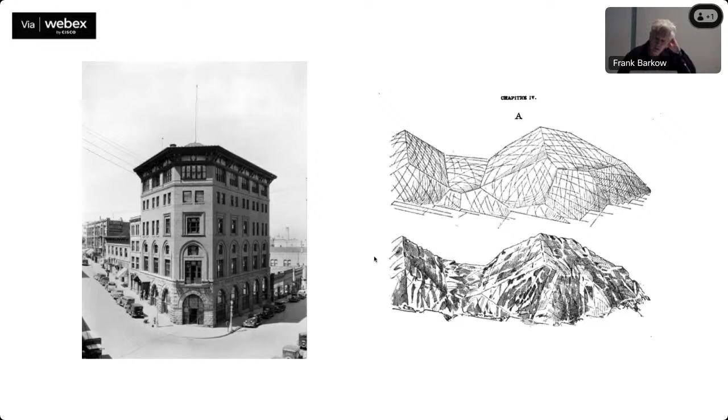In architecture there were a few historical examples like Cass Gilbert, or this amazing landscape. The drawings on the right from Viollet-le-Duc of Mont Blanc were an idea about landscape as a kind of architectural form. The first schools I went to were factories like this in Helena, Montana, the Archie Bray, which was a ceramic and brick foundry.

Some of the first teachers were people like Peter Voulkos, whose work taught at Black Mountain in ceramics, but all of a sudden started to use ceramics in a very different way than, say, a potter using ceramics, more as a kind of installation or environment. This idea of the physicality of working directly with materials was essential for us and how we work today.

I didn't begin as an architect, but as a carpenter, in Germany you say a Zimmermann, framing houses throughout the Rocky Mountains. But I began to understand the relationship between construction drawings and physically building, particularly in timber, in the Rocky Mountains.

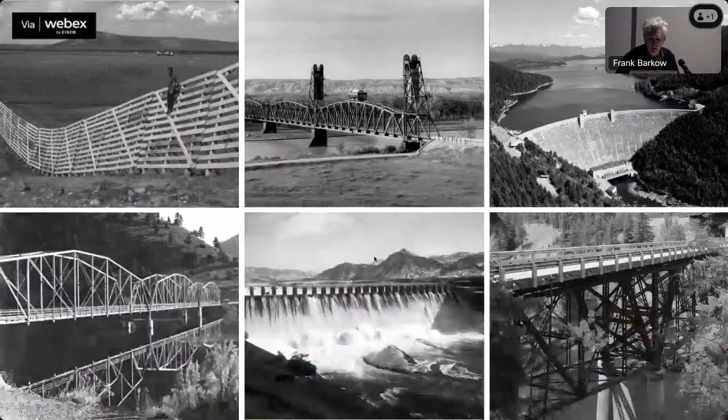I started school in Bozeman, Montana, a kind of cow town of 30,000 people with the largest timber clear span structure in the world in 1957. At the time I was studying architecture, but also grew up doing things like skateboarding or listening to punk music. So it was really a kind of inclusive education of architecture, landscape, but other sort of impulses. In a place as isolated as Montana, one of the things I began to observe was industrial engineering projects that were in a way the most profound and visible structures in my sort of backyard or environment.

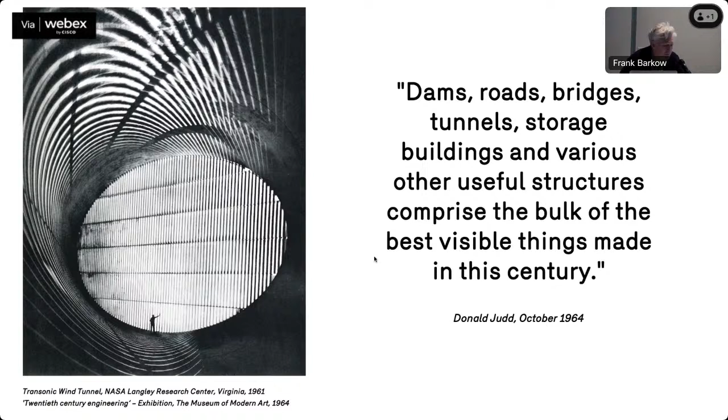This was really architecture. Later I would find quotes from artists like Donald Judd about this, and it goes back to history, back to Corbusier, this idea of utilitarian or engineering projects in America being profound, an architecture in its own right. In '64, Judd's writing about Drexler's show at MoMA in New York, which featured structural engineering as a kind of art form, elevating it as a pragmatic and experimental art form in its own right.

So some of the things we've been doing, and the slides I've prepared for tonight's talk, are really about the importance of our practice being an evolving one, responding to technology, to engineering, to social prompts, and how we can act as kind of bricoleurs, using whatever tools available for creating architecture. That's been a kind of mantra for us.

We've been working for like 30 years. So how do you produce work? How does it evolve? How do you archive it? We started producing our own manuals, not as monographs of architecture, but as manuals focusing primarily on processes: how do you treat materials, how do you transform them through tools, digital or using a hammer, and how that could produce a kind of active archive, a collective building catalog of techniques and materials that work at different scales. We started to both catalog this work and exhibit it at the same time.

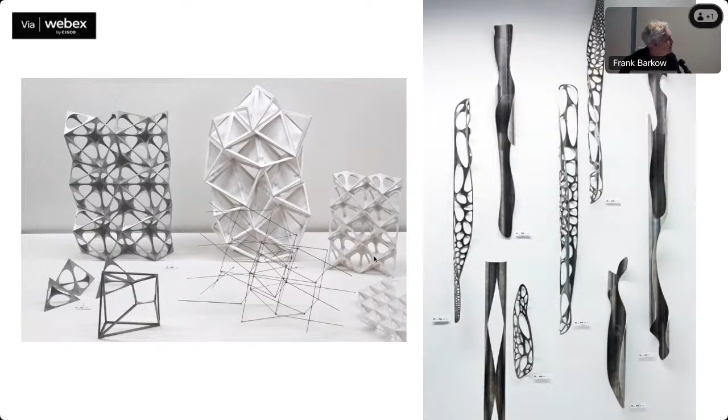This is an early show in a Konstantin Grcic vitrine, a kind of exhibition case of different works. We looked at different tools, high-tech and low-tech, for things like how you could produce a space frame, or tools that could cut tubing or metal in a particular way. I'm showing you this because it's work produced by students who come into the practice and produce research work, which runs parallel to our practice work, our building practice, which we're also dedicated to.

A couple of years ago we had a show called Revolutions of Choice at the Haus am Waldsee here in Berlin, which was a COVID show. It had the opportunity of shipping all this material we had warehoused over the years, just shipping it across town to have a show. So I'd call this an archival work. These are most of the models we produced in the last 20 or 30 years, which we pulled out of storage, put into a warehouse, edited, and then basically just drove across town.

So instead of the difficulty of sending a show to Hong Kong or New York, we could simply produce an exhibition in our own backyard in Berlin by uncrating all this material and showing it. In this kind of COVID vacuum, it was the perfect opportunity to exhibit work at the scale of models, but also at the scale of one-to-one installations. It's important for us that what we exhibit moves away from historical representation like drawings and models, toward experiential installations which are spatial, physical, that you can move into—collecting material that was a wall, a kinetic wall we had in the Venice Biennale for Rem Koolhaas's exhibition a few years ago, to a kind of cross-section of models and physical materials.

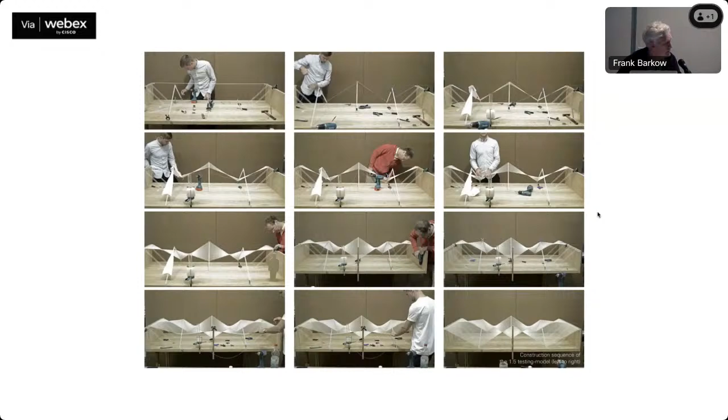Marrakech has no Museum of Modern Art per se, so it was important for us to build in the community, in the city itself, but very much thinking of producing this project digitally here in Berlin through models and drawing, and then adjusting the project to the building culture of Morocco and Marrakech, building things by hand, bringing materials on site with donkey carts, working in the souks to produce these steel fasteners and timber from the Atlas Mountains nearby.

But very much thinking of this as an installation, but also as a kind of prototype, which is scalable. This could translate into a factory, or into a piece of architecture somewhere else, using the kind of luxury or opportunity of working in a place like this, which is quite exotic and sort of offsite for us, as a way of experimenting with an architectural scale which could again be translatable.

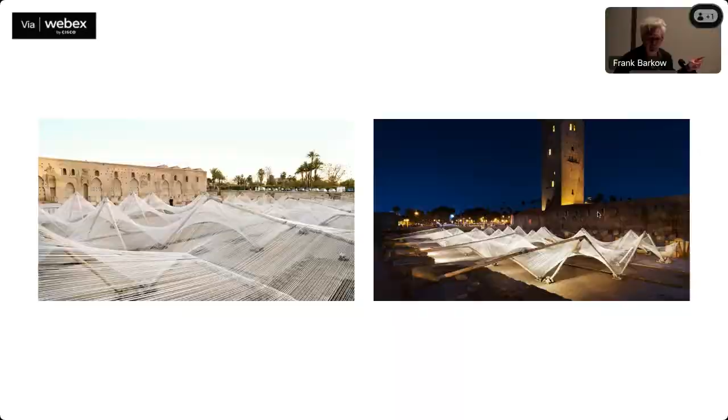So this is a temporary installation for 4 or 5 months, but at a later point would inform a project like this Fellows project, the American Academy in Berlin, which is very much learning using the lessons of hyperbolic surfaces, translating from yarn and timber to steel construction, changing the scale of it, to produce a study pavilion for the scholars at the American Academy, showing how a kind of process or installation scale could lead to a permanent and rematerialized project such as the pavilion here in Berlin.

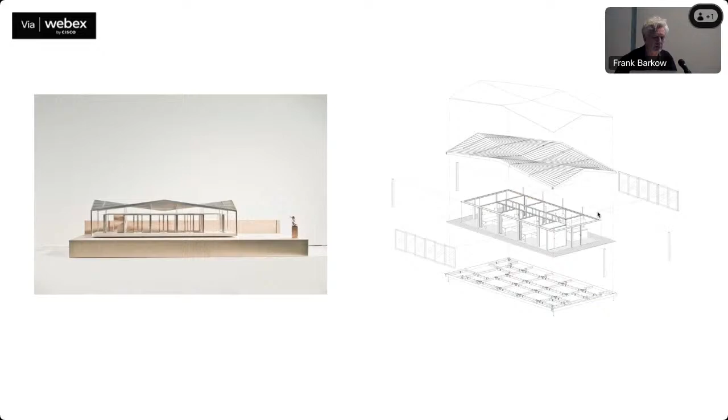So those were a series of process steps that could lead to a project like this, which is again permanent. It's rescaled, it's cellular, it's a place for study in a very, very different site, as well as, I think, an interest in history.

This is based on a project from Tony Smith, I believe from the early 50s, as a kind of structure diagram. It's modular, it's cellular, it can be aggregated and added to other like pieces. It talks about a kind of structural efficiency, three columns with a kind of cable system holding these together.

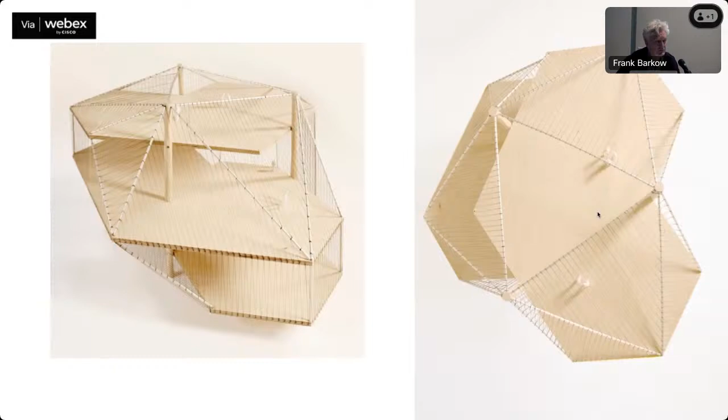We took this as a starting point to translate into a pavilion idea in timber construction with cable fasteners. But the idea was projects that historically for us were incomplete or never constructed, and to revisit those as a viable project with a contemporary interpretation of it.

Frei Otto's Ökohaus, which was an idea for Central Park in New York, was another fascinating idea about housing, or housing with landscape. The Ökohaus here in the Tiergarten is another important reference, but again as a kind of incomplete project, which we investigated in terms of how do you make enclosure, how do you think of the structure, and can this translate into, say, timber or hybrid construction?

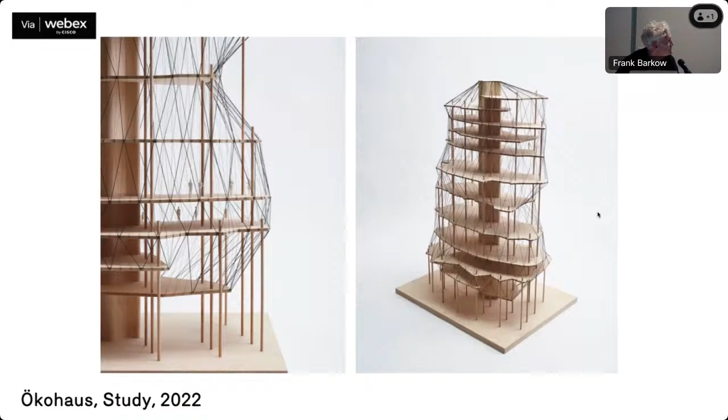So as a kind of exercise of completion, for projects that might have existed as a sculptural identity, how could that be rethought as an architectural, scalable, programmable, sustainable solution?

So another one, tensegrity, which is one we've been messing around with. And again, like these kind of Buckminster Fuller projects, they always existed as a diagram or as a demonstration, but never really reached an architectural complexity.

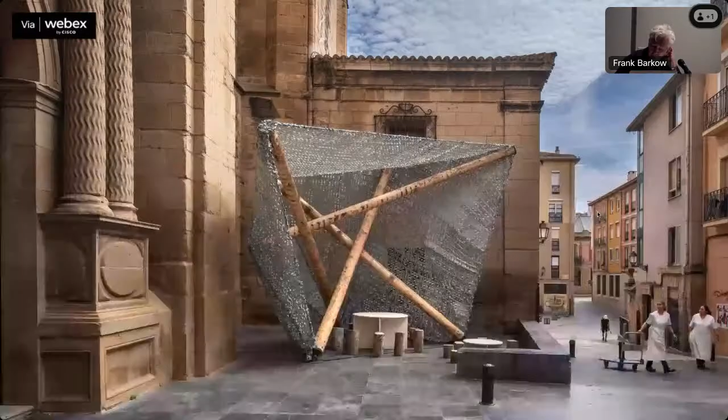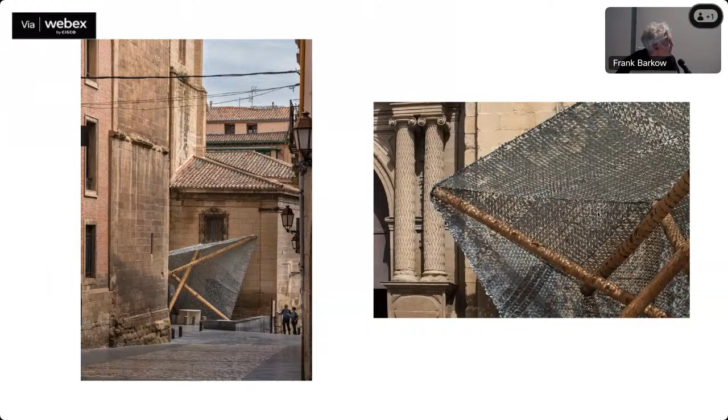So we started producing these tensegrity projects. We started again using exhibitions as a chance to install these things in an urban space, to consider them at a more architectural scale. How do you put it together? How do you construct it with local materials and local craftsmen? What are the economics of these things? Again, this is a kind of prototypical temporary building to test something which could be scalable, contextuable, but also could translate into something else.

So some of the towers we started to produce as models. How can you take a tensegrity tower? Can you make it structural? Can you make it architectural? Can you produce it as a high-rise construction? How does circulation work? These are all the things we were talking about this afternoon with the students.

And then bring structural engineers into our practice and say, does this thing work? And it's built in such a physical dimension that you can see how it works. So there's the economy of materials in this thing, there's a way of making enclosure with lightweight materials. But again, asking this question, how do you take a sculptural conceit and transform that into an architectural outcome?

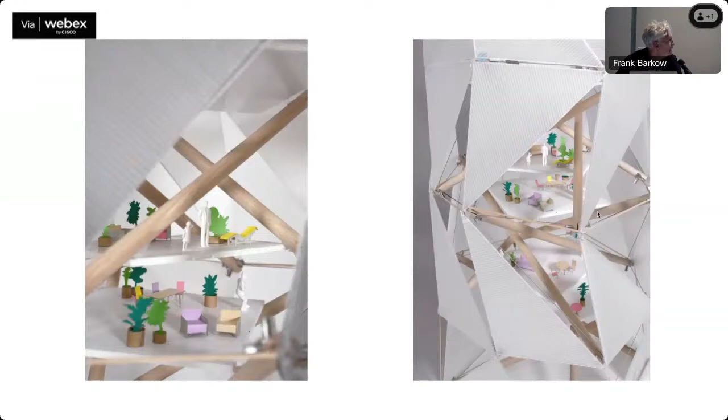So even to the kind of ridiculous projects like this, the bubble house, which we produce with recycled plastic Coca-Cola bottles, a skin as a kind of aggregate structure, which has a scale.

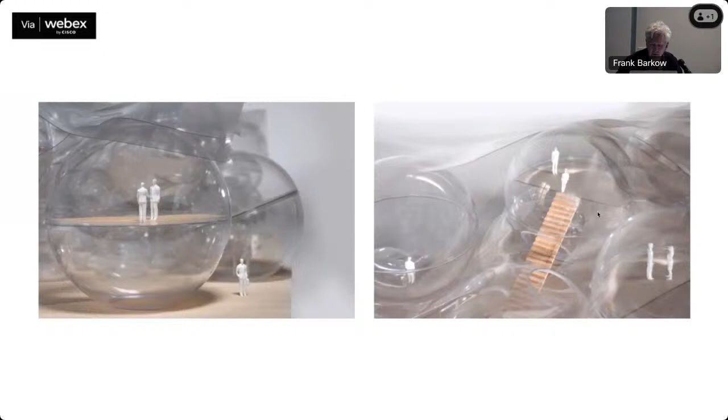Just again, as we're all doing these German competitions, and you're very much locked into the kind of rule-based experimentation, it's important for us to have a kind of parallel practice where we can try different ideas about space making or programming that are much more out there.

The Serpentine Summer House, which we did a few years ago, again, like Marrakech, I think works very much as a kind of prototype, or like the Tony Smith Pavilion could be something that could be aggregated, could be expanded, producing a temporary summer house next to a historical pavilion in the Kensington Gardens.

Modeling, we have a workshop, which is kind of the heart of our practice, which is down the street here. But very much working in model most of the time to produce form.

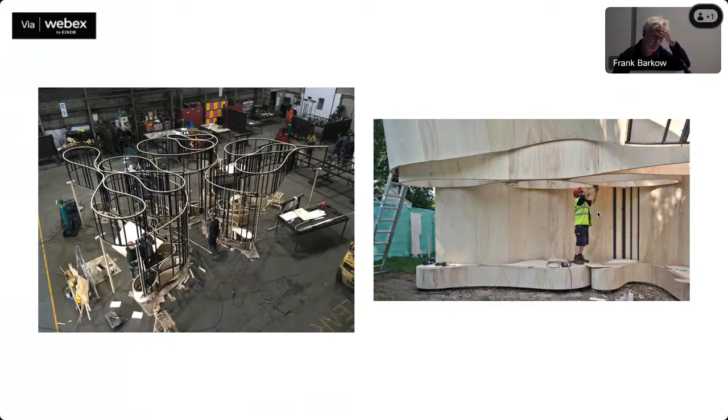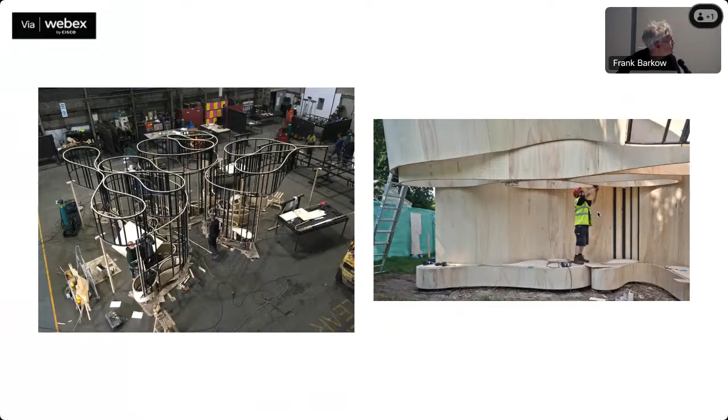So this is both a model that then translates into construction in Yorkshire, north of London, into bendy ply cladding. Again, trying to work out the economics of it, the kind of the structural idea of this. We're working next to Yona Friedman, so he's very familiar with this kind of technique. So how does this have a kind of structural potential?

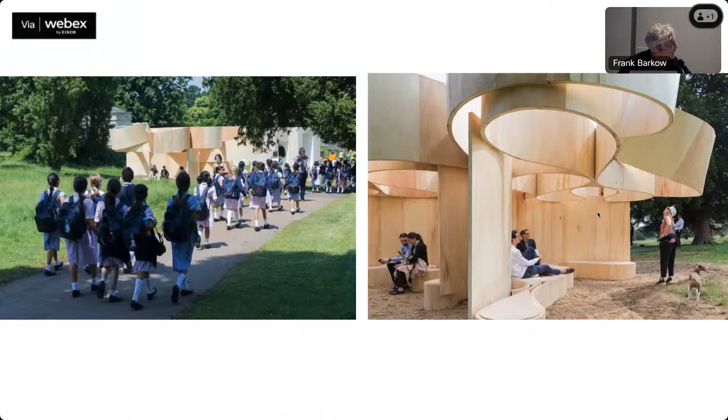How does it spatialize? How can you add up to this thing? So again, a temporary summer pavilion, but something that could have an afterlife. It's scalable, it's programmable, you can produce enclosure for it, but it's portable.

We reclad it in a different configuration here at the Haus am Waldsee in Berlin. So these are sort of transient projects or projects that can move around and reconfigure, but again, sort of replacing this idea of exhibition or challenging it in a different way.

Casting, this was the entrance that we produced to the Haus am Waldsee exhibition. Very much interested in this idea of bricolage, where the materials for the walls were collected from places like Teufelsberg. So this is representing bricolage of recycled materials from the debris after World War II, combined with infralight or self-insulated concrete as a material that has a kind of historical resonance.

But also a kind of, again, this idea of recycling in a very different way, combining with, in a sense, a high-tech material like infralight concrete to produce an idea for prefabricated concrete, self-insulated walls, which could be load-bearing, could be an infill material, can have a texture, can be machine finish, smooth.

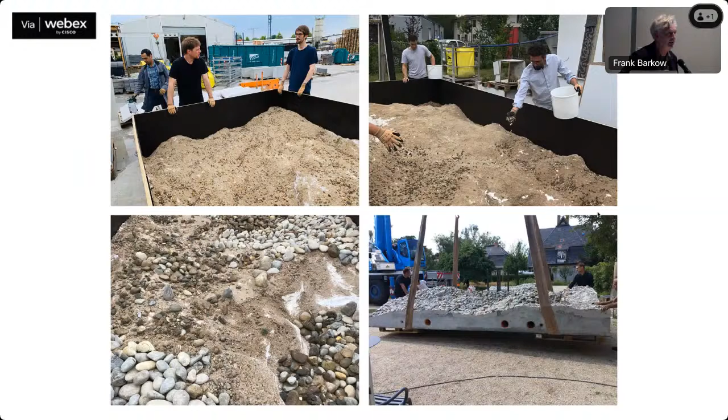I don't know, again, I think this is also something that I really like about a place like Germany, is that you can become your own expert in terms of technology and producing things. This idea of a kind of Tüftler, where there's production and fabrication partners who will make things for you.

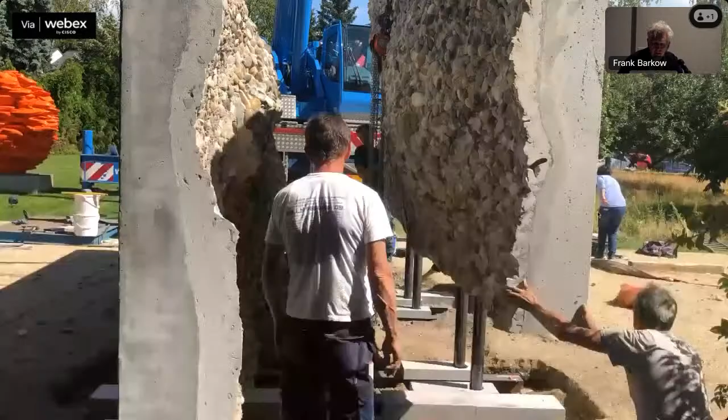These are our guys making the formwork for these pieces, putting the aggregate in, pouring them. And then having these worker guys install the piece at the Haus am Waldsee.

So again, even though this is operating at a kind of museum scale, we're really thinking about this as a kind of mock-up, or as a kind of technique that could produce buildings.

And of course, I'm down at Madrid talking to Anton Garcia-Abril and people, other friends, colleagues, about these kinds of ways of producing things.

But when I came out of school in the States, you would rely on building catalogs to find out how to do things, and here, in a way, you have a chance to produce these techniques or levels of experimentation on your own. So we run workshops in the practice.

These were some of our Harvard students who are potters who could produce elements like these, or later different techniques in ceramics. So if you're in an art school, you have access to these kinds of technologies also, which we're always extremely curious about.

And also thinking of these things at the scale of 1-to-1, or thinking of techniques like this, which is double form pottery and cut, at the scale of architecture, which could be constructed in masonry.

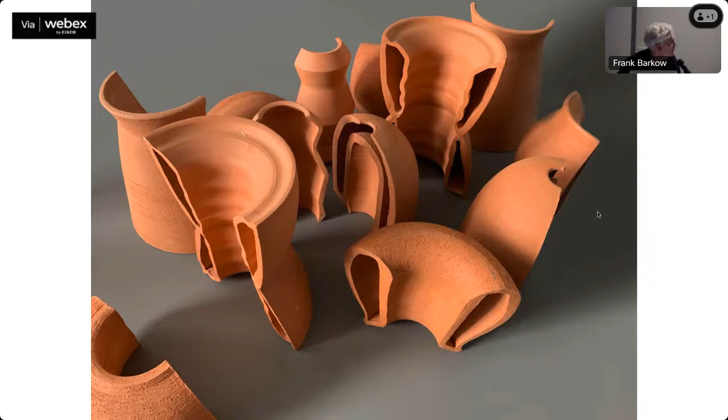Starting to produce ceramics as cladding materials for our buildings, working for companies, with companies like NBK in Emmerich, which will produce these things, anything you want.

And then going back to our clients, you know, our actual building projects such as the B Hub here in Berlin, which is a kind of horizontal megastructure clad in a ceramic that we produce, or in a sense invented within our own offices here.

To other techniques such as bundling, which again has to do with both scripting digital technologies and machines which will rotate and digitally cut scripted plexiglass to bundle into arrays like this.

So again, we don't think of these as objects so much as actual installation environments that you can walk through. It has a scale, it conditions light in a certain way.

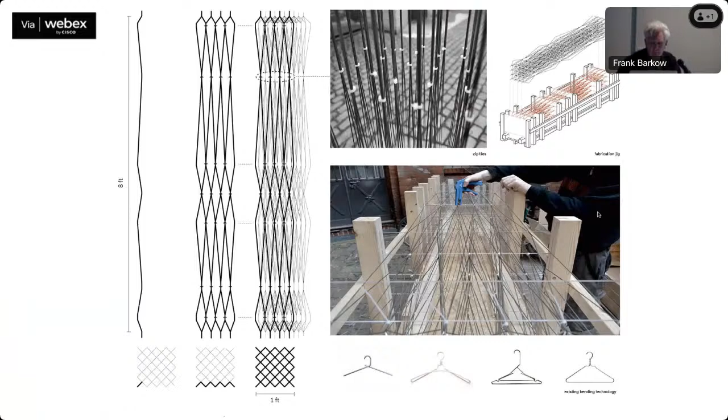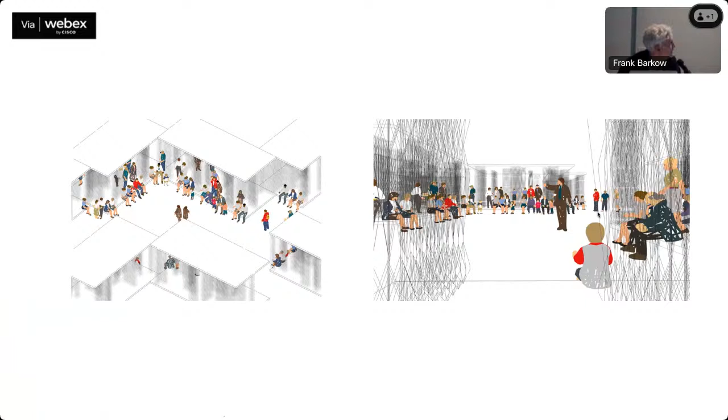The Thicket project, which we produced for this exhibition, How Soon Is Now, is essentially tessellated 2mm stainless steel rods. There was an idea about drawing these as a kind of space frame, and then using a coat hanger factory to digitally bend these tubes, which we could then bundle together in our courtyard and zip tie together to produce incredibly stable structural elements that we later configured at Princeton with plywood roofs to make a kind of roof structure pavilion, where the vertical structure is essentially like a cloud, completely ephemeral, dematerialized through this incredibly thin material, which could produce a new kind of architecture through the discovery of bundling, in a way, an off-the-shelf material.

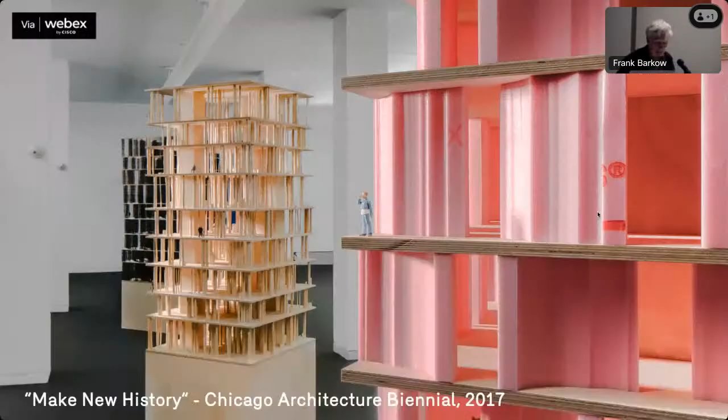To carry these ideas into other more programmatic ideas, the idea of housing or even affordable housing in different materially configured towers. We had figured out about 30 locations within the Karl Marx Allee where these could fit in between the Plattenbau structures. On the right, infralight concrete, in the middle, pine trees or a tree configuration, which would not work as surrogate columns, but really as almost like stacked forests of cheap local Berlin pine, creating spaces with circulation, thinking of the economics of producing these things.

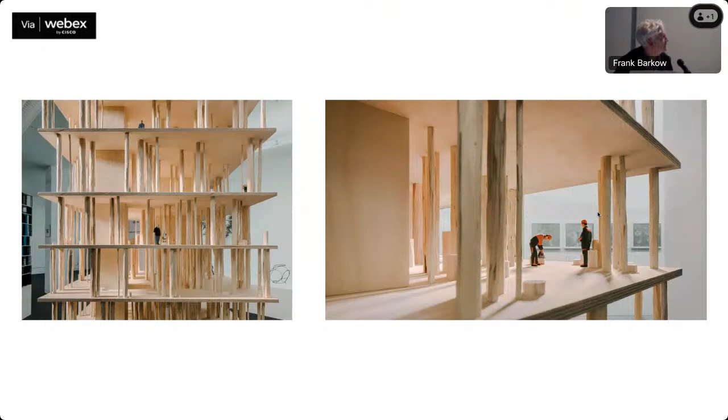And as legislation becomes more and more open to timber construction, and timber construction as high-rise construction, each one of these towers in the presentation and in Mark and Sharon's curation of the Chicago Biennale was about how do you make new history, or how do you make history new?

So we were very much thinking about different material configurations. This one in some kind of metal, again a tessellated, lightweight metal, to do these things as a proposition about point tower housing that could add density in a city like Berlin.

When we arrived in Berlin 30 years ago, there was huge interest for us as students in things like land art, particularly for me in the American West. As young architects, we were not allowed to work in the center of Berlin, but really working very much in the peripheries.

So we discovered these demilitarized sites, such as where the biosphere is in Potsdam. This was a landscape created by the Soviets to protect their barracks, and it was being transformed into a park, a city park.

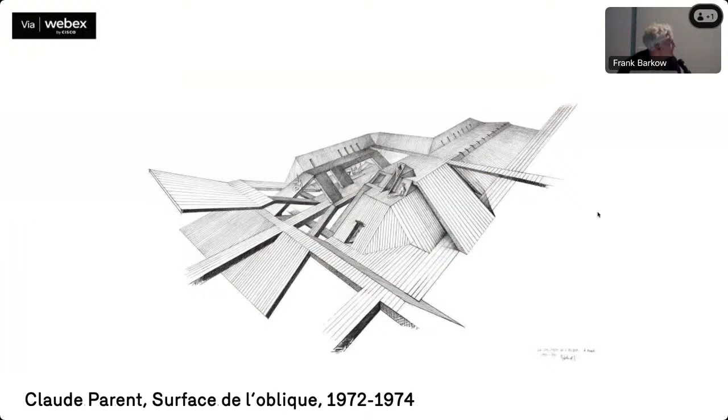As we were teaching at places like the AA, we were meeting people like Claude Parent, who talks about architecture of the oblique, and suddenly we're working in a context with a kind of landscape, an artificial military landscape, that can become a building block or a kind of material for producing landscape.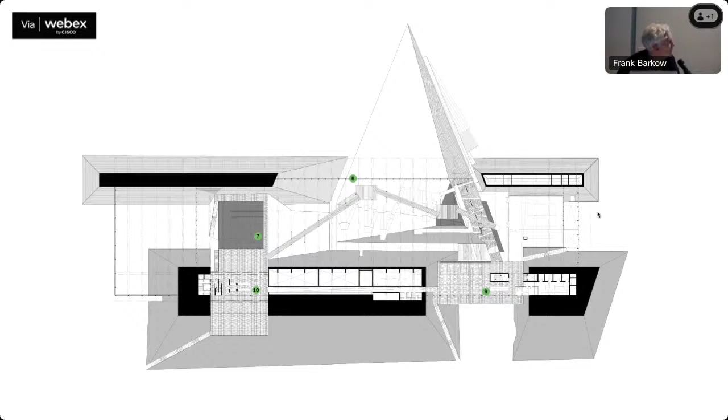So the diagram for this, and this idea of topography, was: we're not going to make a crystal palace, but we can actually cut into the ground, excavate it. Very much in our interest at the time was architecture as landscape, or landscape as architecture—we would simulate these kinds of mounds or landscapes to produce a kind of greenhouse or enclosed building within the context.

We can cut and fill, excavate the ground, and produce these kinds of berms which then connect out to the park that Peter Latz was designing and building. For us, this was a completely different experience and answer to Berlin—rather than the historical city, in the periphery we were finding super interesting conditions of damaged, demilitarized sites that could generate a very different kind of architecture.

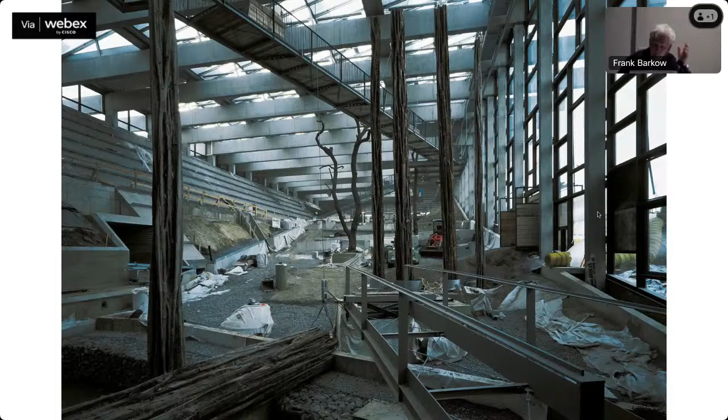And producing a kind of architecture that was, I'd say, more infrastructural. It wasn't about schöne Details, but really about building a building economically in one year, in the context of a very strange, almost land-art-scale landscape.

So there was an interest in topography, rather than typology—topography as a way of operating and working, generating a very different idea of contextual or site-specific architecture, a building that could transform.

It was originally for the German Garden Show, later became a kind of event space. It may ultimately become a school—so, an architectural framework that can transform every 10 or 20 years based on use and utility.

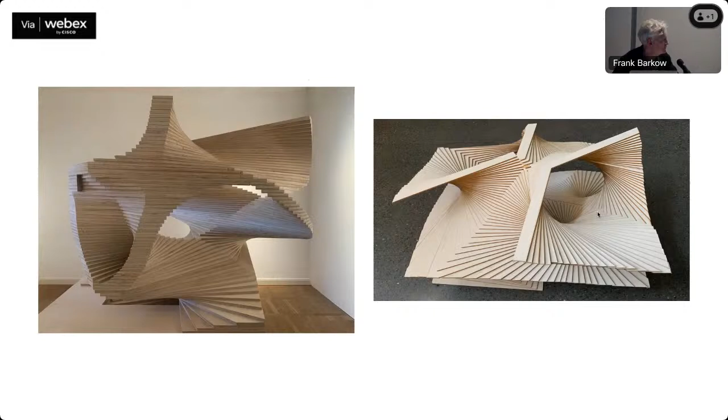A more recent project was the opera sets for Fidelio in Vienna, directed by Christoph Waltz. The question was how could topography reinterpret the Theater an der Wien, a Baroque 18th century theater, continuing its topographical space into a kind of stage set animated by the singers and actors in Beethoven's only opera, through spaces with apertures that people can move through.

How do you do that? We never did a piece of architecture so precisely choreographed, where every singer is moving through this either as a group or individually.

Again, a timber structure, prefabricated in Poland in sections, brought to Vienna and then built like a ship in a bottle into these spaces.

Again with this idea of spatial continuity, the curved walls of the historical space continue through the actual sets of the theater, almost the same size as the seating area of the historical theater itself, into a highly choreographed, scenographic, musical space where the stage sets themselves act as a kind of acoustical amplifier of the sound and music—the precision of being able to work into this thing. So again, topography as an approach, but in a very different context.

And the idea of architecture not as a building or an object, but as a complete continuation of the Baroque space within a very contemporary idea of the space.

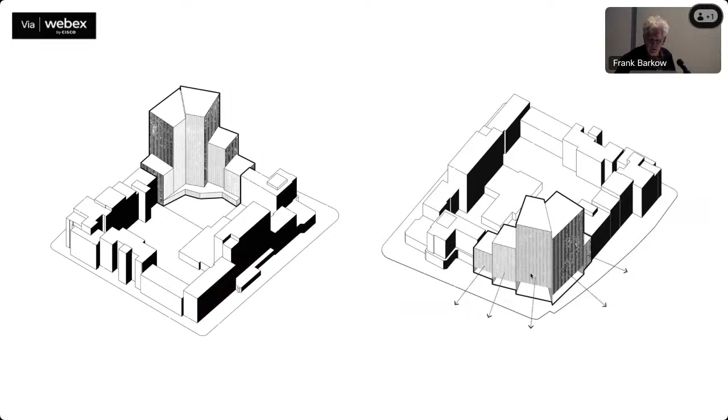Again, not very far from here, but a very different kind of context. Thinking about these pieces as extrusions out of a ground that could be cut, with a rough cut stone cladding for the building.

So again, we're always doing these competitions against each other—sometimes we win them, sometimes they win them.

Timber, which I've indicated, has become a go-to way of construction—for me as an old carpenter, but also with the idea of quick fabrication and sustainable construction.

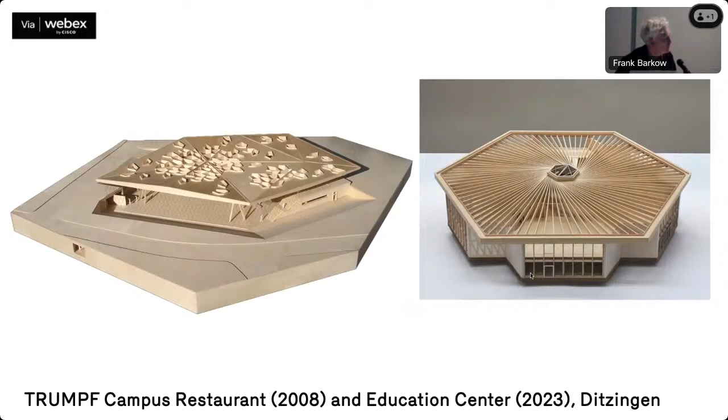We had done this campus restaurant some years ago using digital technologies in the Black Forest for cutting glue laminated engineered timber, working with Werner Sobek in Stuttgart. This looked at biological hierarchical structures, transforming that into a hybrid steel and timber structure with a honeycomb roof, where the roof can be programmed for daylighting or artificial light.

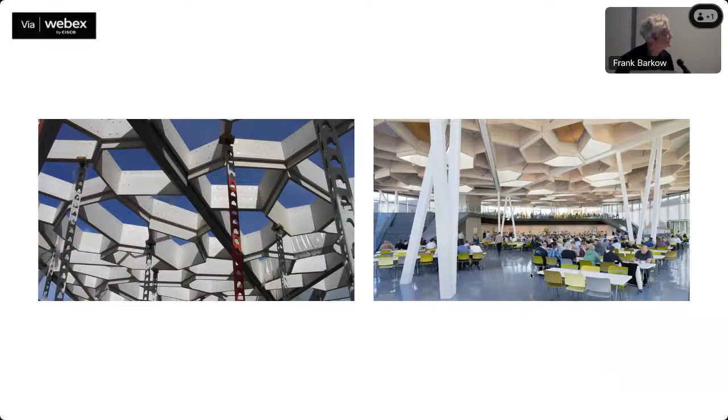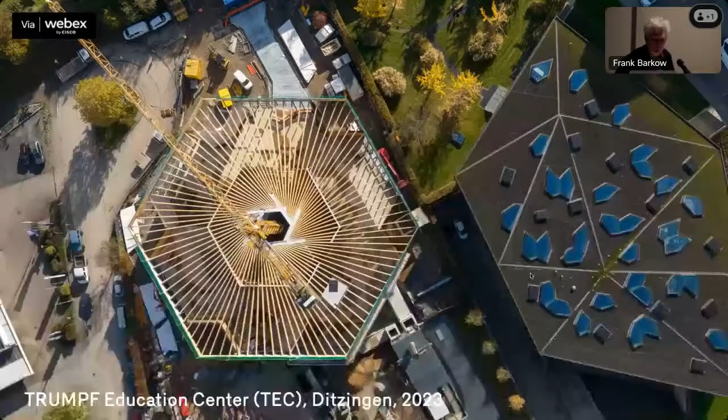Or acoustics, into a one-off custom structure for a cantina—which in Germany is a restaurant or cafeteria—but thought of more open-endedly, programmatically, as a kind of event space or social place for workers at a factory to meet and exchange, a place of encounter.

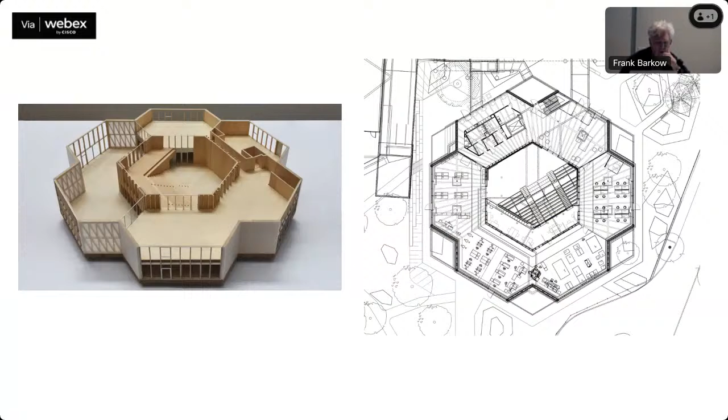Next to it is a recent building for students or Lehrling apprentices, also built entirely in timber, in a polygon shape adjacent to the cantina I just showed you, continuing a language of forms. This building has classrooms, machine rooms, and a central auditorium with double-height and single-height spaces, built as a kind of organic, modern Fachwerk idea of Southern German construction.

If you thought of the old timber constructions of the 18th or 19th century, and then how you build it—we put a crane right in the middle of the skylight, then assembled these prefabricated walls, either opaque or glazed, in a construction sequence that was almost as fast as this film.

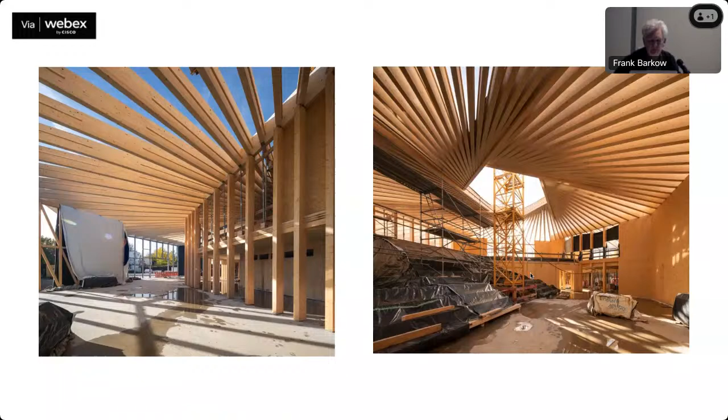It was really super fast—they could frame this up within a matter of weeks because of the idea of prefabrication and assembly on a relatively simple site. That was a kind of learning process of how you conceive a project, but also how you produce it, how you fabricate it, whether you can get all these pieces locally, install it, what the economics of the project are, and how you stage and phase it. That became a really interesting aspect of this kind of one-off project in a high-tech place like Stuttgart, where you have fabricators and craftsmen who could put something like this together.

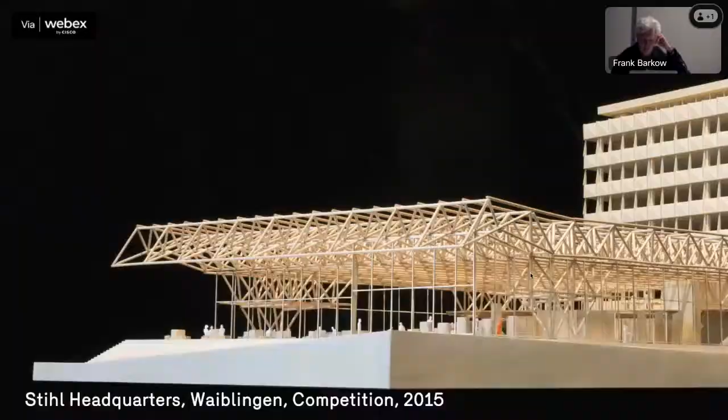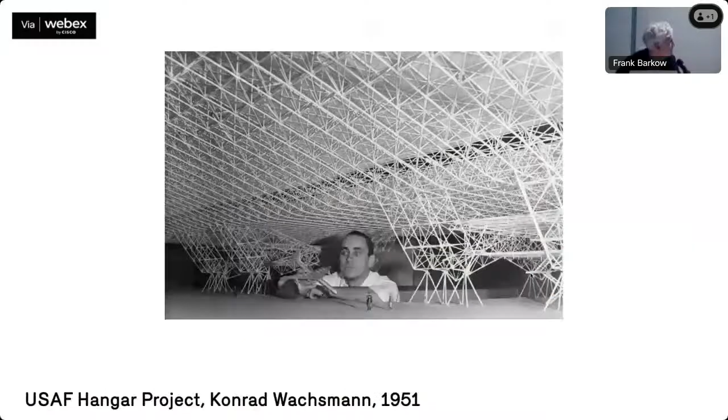Stihl was another one of these Mittelstand Southern German companies who famously make an amazing chainsaw, which for me growing up in Montana—everybody has to have a chainsaw. That's how you get around.

Looking at a historical project like Konrad Wachsmann, his idea of working in space frame technology—the idea for Stihl was, because they have these forests as a kind of crop...

We could select certain trees, use their chainsaws, cut the trees down, and make super low-tech trusses out of their timber to create a space frame for showrooms for their stuff—they make clothes and boots and chainsaws—next to a 1950s building, their office building, in the middle of nowhere in southern Germany. So again, kind of dumbing down the more high-tech aspect of Wachsmann's space frame into something simpler.

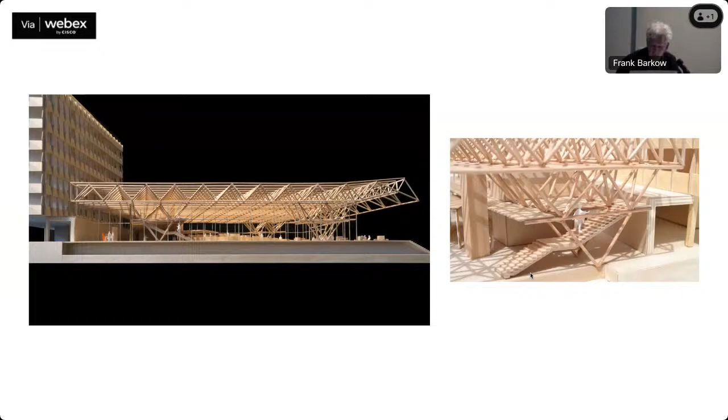Peeled log construction with really simple joints where you could just pin them together or nail them together to create a structure like this. So very much a client with a tool that could produce a certain kind of architecture that would really speak for that place and technology.

A couple of weeks ago, we did an installation in Austin, Texas, at the architecture school, which I called Texas 2x4 A-frame. Very different than the Stihl thing, but working with 2x4s, which is the cheapest and most common construction element in America.

A 2x4 by 8 feet costs $3.20, so it's super cheap. When I grew up in Montana, if you had a ski house, it was usually an A-frame like this, which was the cheapest and quickest way to construct a space. But they always stayed this very simple one-room, chimney, drop-down, enclosed space.

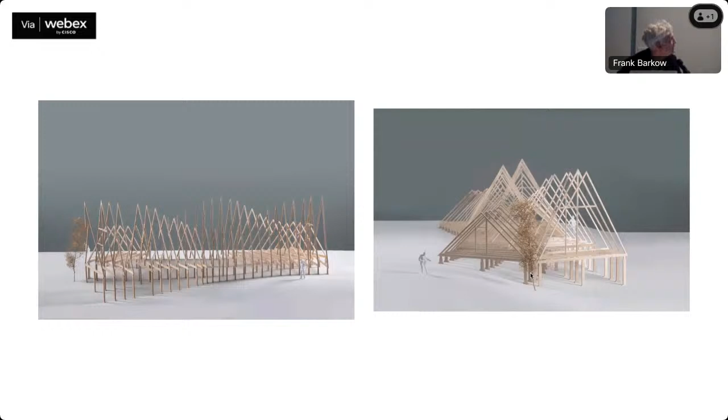Our question was, with digital technologies, can you take this very simple typology and turn it into much more complex structures—programmatically complex, configurable? Can this be housing? Could it be configurable housing where you can make it bigger, make it smaller, put it on a flat site, or put it on a steep site?

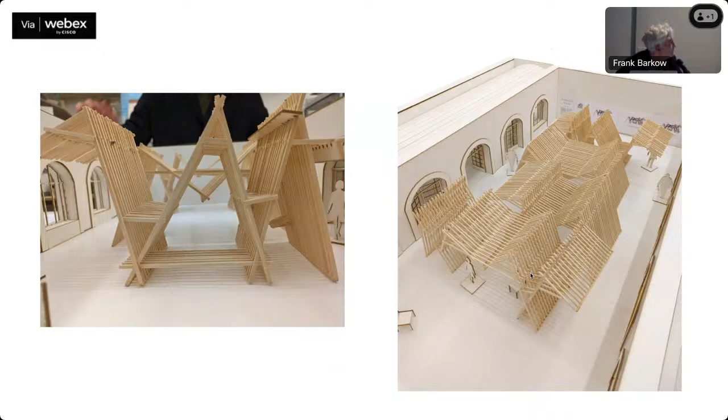So we built this in the showroom, which is in this gallery in a Paul Cret building on the campus of University of Texas. We got all the pieces. The whole thing cost $5,000, which is extremely cheap for rough construction for housing. They could recycle the project when we were finished.

As I said, it was configurable—adjustable to site conditions—as a kind of idea for a place like Montana, or America, where most houses are built out of stick frame, 2x4 or 2x6 construction, into a configurable sectional water collection, photovoltaic, net-zero construction, but at the same time could be structurally and spatially interesting.

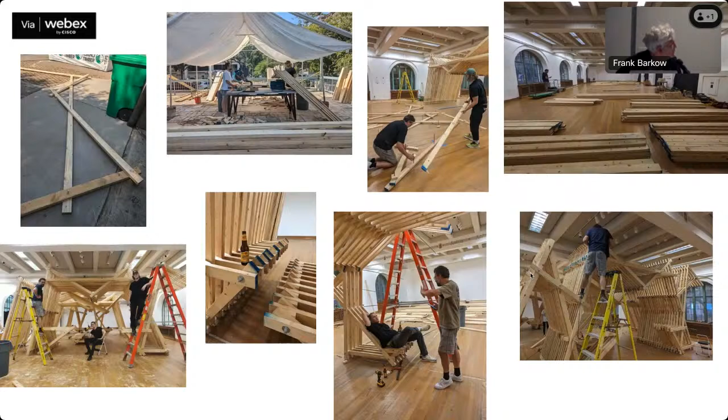They don't have 2x4s in Germany, but we got the closest thing, and built this in our gallery space in the studios, translating the know-how: how do you pin these together, how do you prefabricate them, how do you put them together at the studios. Our shop guys and the students put these things together outside, then put it together inside. They could build the whole structure in a week—kind of an exhibition demonstration project.

We combined it with Enzo Mari furniture. Enzo was an Italian communist who was very interested in do-it-yourself.

You could build a chair for like $20 combined with tables and chairs with this structure. This is sort of rough construction, but we had figured out how to do the cladding for it in polycarbonate on the skin. We could figure out how it would work someplace that snows a lot, or not much like in Texas. As a demonstration piece, it was up for 6 weeks, but we could reconfigure it elsewhere on campus. It's a kind of historical prototype, the A-frame house, using the logic of triangulation and expanding it into a more complex sectional and spatial configuration.

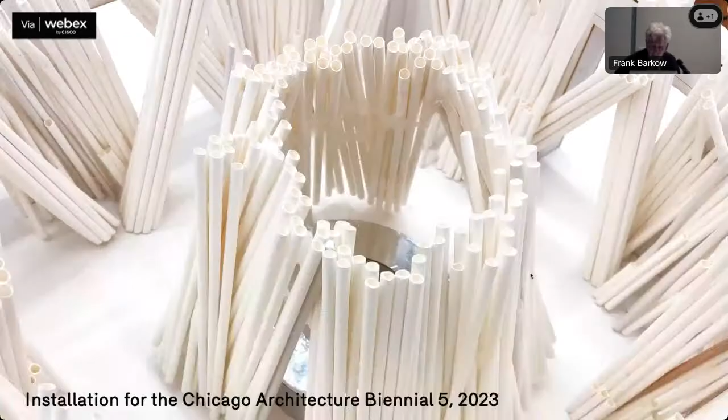Right now we have an installation at the Chicago Architecture Biennial, built out of mailing tubes, as an interior installation in their lobby out of basically recyclable or recycled cardboard tubing. We were interested in projects like the Merzbau in Hanover, a reconfiguring of a historical interior through collage and bricolage, but combined with material about recycling, coming out of the COVID super Amazon mail-order era, and how you could use this material in a configuration like this. Thinking about this as a prototype, it could be taken out of the gallery space and work as a structural, freestanding architecture for very little money, made out of a simple material, simply bound or glued together.

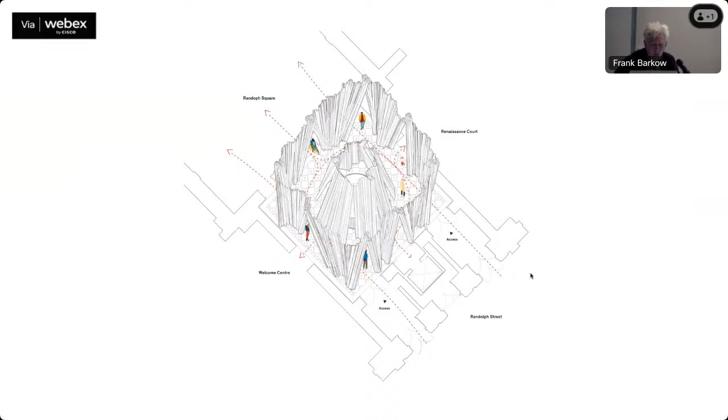In our project space, we mocked it up to see if it would work, then went to Chicago and configured this as a spatial, experiential entrance pavilion to the Biennial itself, using bundles with a structural logic which is temporary but could be a permanent idea about structure and enclosure in a very different context.

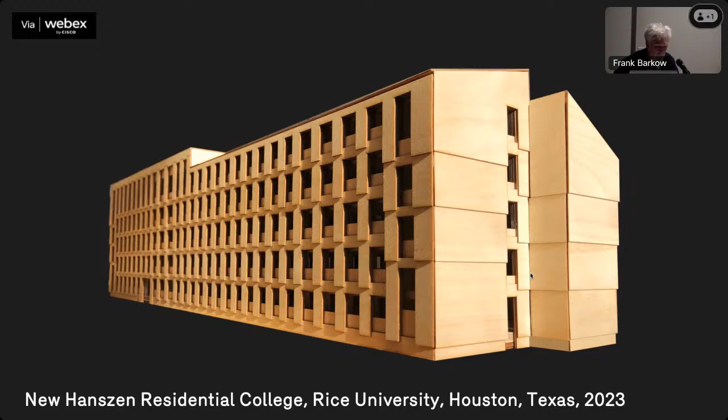Like the 2x4 project, we're a building practice, so we're being asked by universities to look at real-life problems like residential housing for students in mass timber construction, building a residential addition to the Rice campus, a historical campus, in a place like America which is always about 10 years behind Germany in sustainability, technology, and engineering. How you could produce affordable student housing in timber construction.

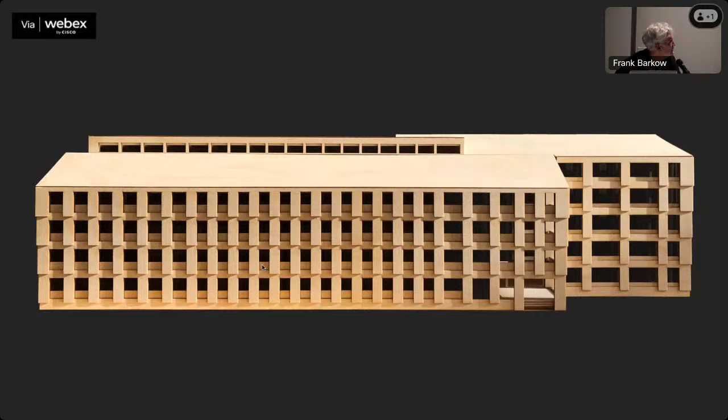So producing that construction on a lightweight facade in a split-level section, bringing that on site during and after COVID in a post-and-beam construction with CLT construction, fitting within a historical context.

Rice is kind of like an incubator for architecture. They had a classical era, a modernist era, a postmodernist era. So inserting this building into a historical campus, while introducing to Rice the first example of mass timber construction on campus, and figuring out how to do that in the States, finding fabricators or producers that could produce these elements and bring them on site.

At the same time, I was doing a house in stick framing for myself in Bozeman, where I'm from, on a 5-acre site, an atrium house, which is an unusual typology for Montana in a context I'd call rural suburban. But even this place had a history of mid-century modernism—there's a Neutra house nearby built out of log construction. I wanted to produce a house that could work as a work-live space, either introverted around a central courtyard or able to open up and expand out to views into the countryside or the mountains.

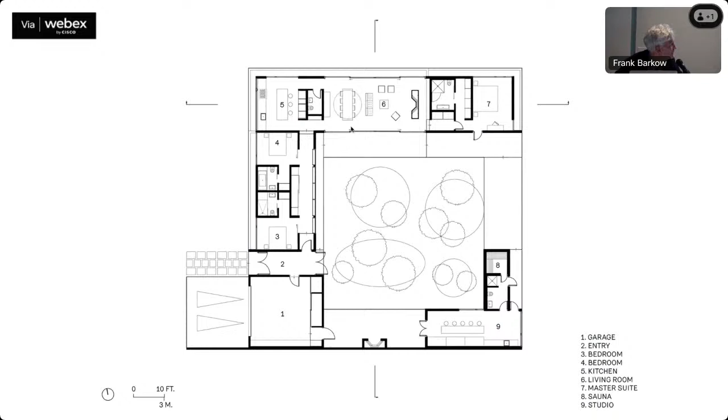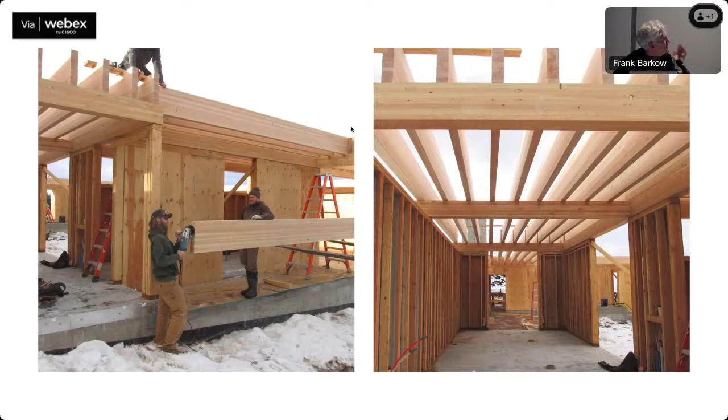So you have the idea of the house in this unfolded section that could incrementally—which we could also have done with our 2x4 project—adjust to the sloping site in this mountainous region, using stick framing but prefabricating and pre-cutting as many elements as we could to produce this framed-in building.

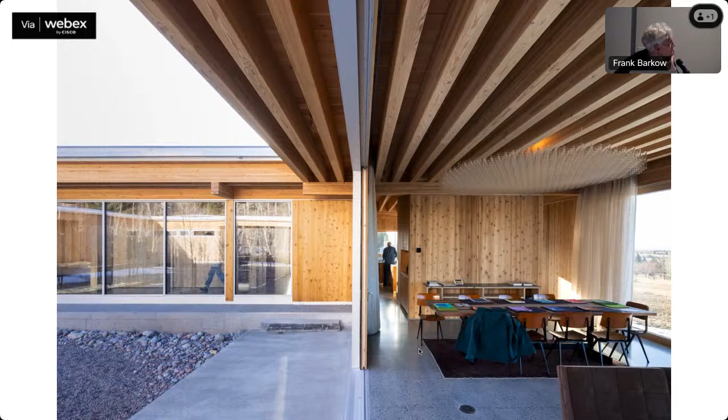It has a rock garden sort of in the center. You can heat it incrementally as you like. If you need more space, the exterior spaces can be infilled later. The idea is to use it as a house somewhere between the typical suburban houses of America and the McMansions also nearby, but one that could work both as a living space and a workspace within this context.

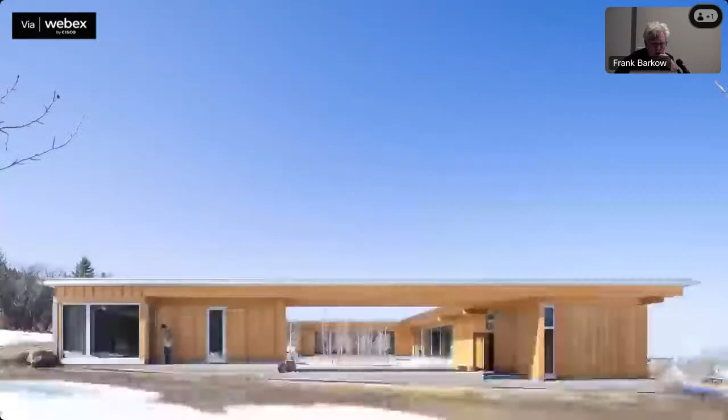So very much using the typical industry standards for framing—wood walls and glulam timber long spans—but producing it in a very different, and I would say more modern, way.

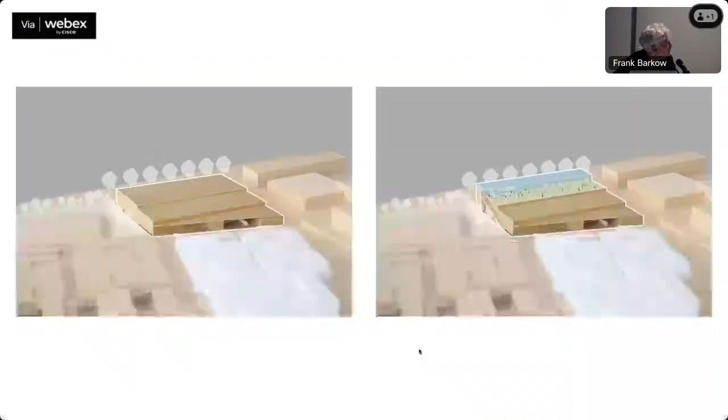I think this is leading to other timber projects we've been doing, which have to do with an industrial site where we're adding—I guess in Germany you call it Aufstockung—adding onto an existing building. This was a storage facility where we built a timber building on top of it for an industrial campus as a fitness center, which we could drop on. It's timber, so it's lightweight.

As an idea of a Nachverdichtung or density strategy for adding different kinds of programming, mixed-use programming on what's typically very homogeneous industrial site programming. Looking again at an almost prototypical example, for competitions for office buildings, like this one for Friedrich and Carl, which is a configuration that could work on almost any site. It's adjustable because of this sliding strategy of a post and beam timber construction with a roof that can be photovoltaic.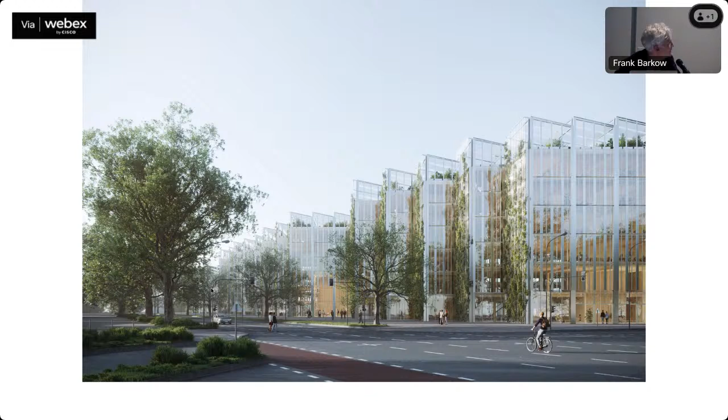It's a kind of prototype for office or housing up to six stories using this construction. So I'm bombing you with a lot of projects, but all of these are related to each other in terms of an evolution in the practice, how we're thinking about projects and rethinking old projects. Ten years ago we would have thought about an office or loft building in Germany very differently, but based on these techniques, we're looking at these kinds of approaches.

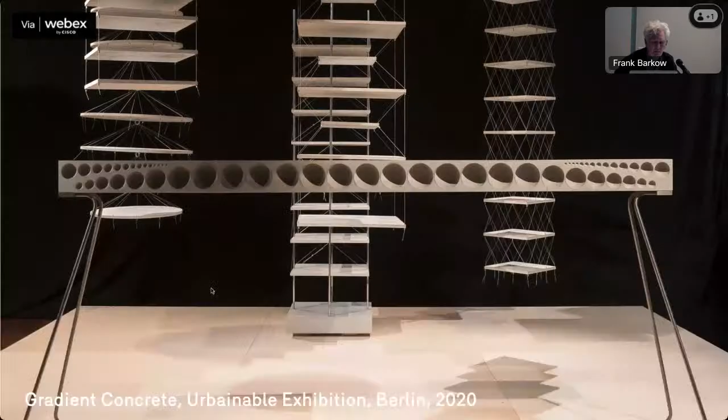I think, starting from the beginning of the presentation, going back to structure, ultra-structural — I think this is the last chapter in the talk tonight. How can structure be architecture?

Working with engineers like Sobek, who's committed to concrete but acknowledges it's bad as a sustainable material, so let's use less of it. He's doing things like making gradient concrete, where concrete is now — if you cut a section through your arm, don't do it now, but the bone structure is porous, like a sponge.

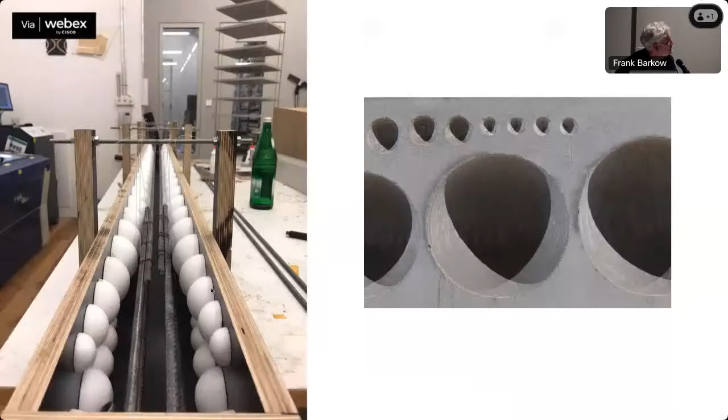He's looking at a kind of parametrically variated section of concrete where you use half as much concrete as you normally would with steel reinforced concrete, and testing that. We're always looking for prompts like this in architecture — if an engineer comes up with that, can we make architecture like this? All of a sudden, suspending floor plates which are half as heavy as normal concrete could produce superstructures.

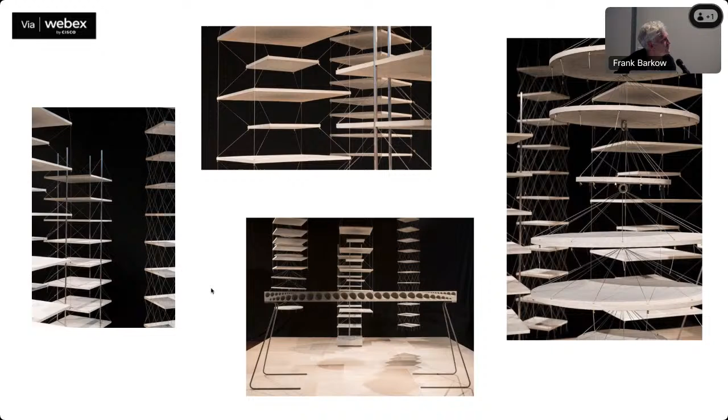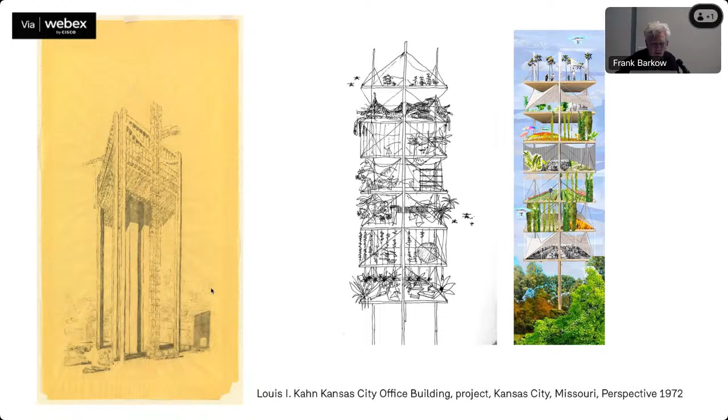Where you suspend the floor plates with an idea of lightweight, building quicker, using less material — again looking for a structural invention that could drive an architectural project. I was talking about the Kansas City project from Louis Kahn earlier, the idea of building a superstructure, a truss on the roof, and dropping the floor plates down below it. So a contemporary invention of using concrete differently, coupled with a historical project from the 70s for living and gardens suspended from a lightweight, quickly constructed structure. This is stuff we like to do, looking at historical places.

There's a smart factory outside of Chicago that we finished a couple years ago. Chicago again — looks like it could be anywhere in America. But looking at building culture, like in Chicago they're really good at making steel stuff, whereas they could never — they'd be terrible trying to pour concrete, but they can do things like that.

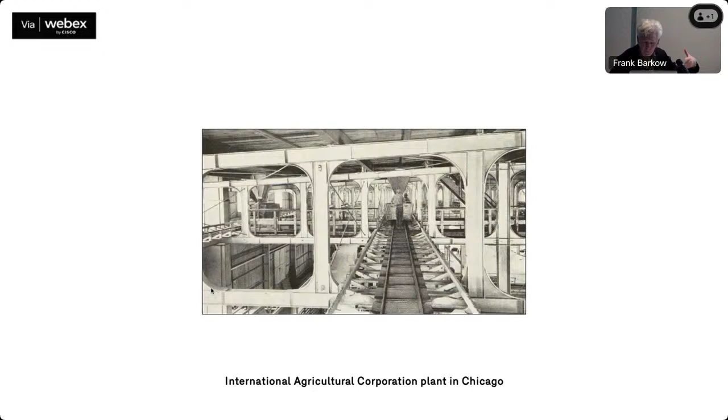So looking at a smart factory, which is a clear span structure for machines in this figure-8 configuration. It's a suburban project on an abandoned site for Trumpf, but looking at, in this case, Vierendeel trusses, which we could produce off-site. Vierendeel trusses go back to the late 19th century.

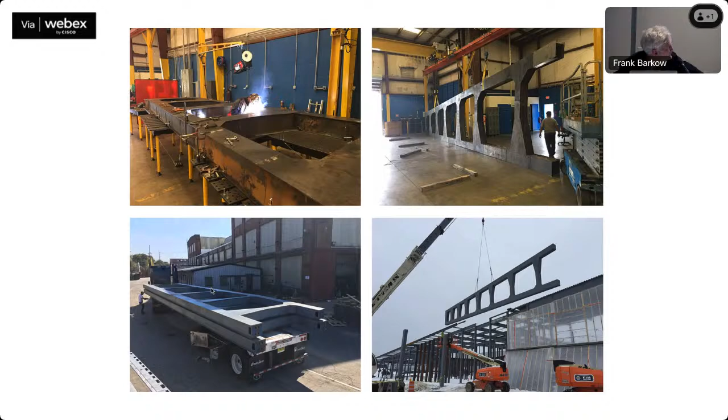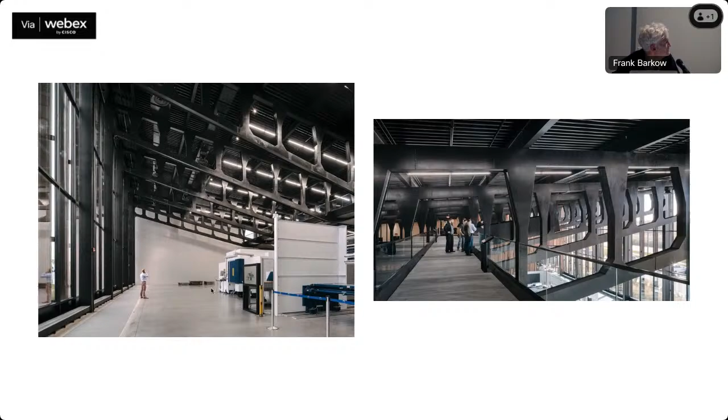But now, laser cutting and laser welding these to produce these large arrays, which again brings the idea of structure as space, or structure as something you can occupy through these arrays. You can walk through the structure, you can add more programming or space to it. It's a continuous interest in structure having a use value beyond simply holding roofs up, particularly in these strange periphery sites between natural wetlands and infrastructure like the Autobahn, which is how it works on the last project I think I'm showing tonight.

I think I'm on time, but this Trumpf campus in Stuttgart and Ditzingen outside of Stuttgart, this entire campus, which is very heterogeneous, has gone from a kind of factory campus to, I would say, a more mixed use.

But the factory is something that doesn't have to grow horizontally and infinitely, but can also start to grow vertically, can become programmatically more diverse, more like a university campus rather than an industrial campus in terms of change. So the kind of master planning of this, or what we call soft master planning, which is adaptable.

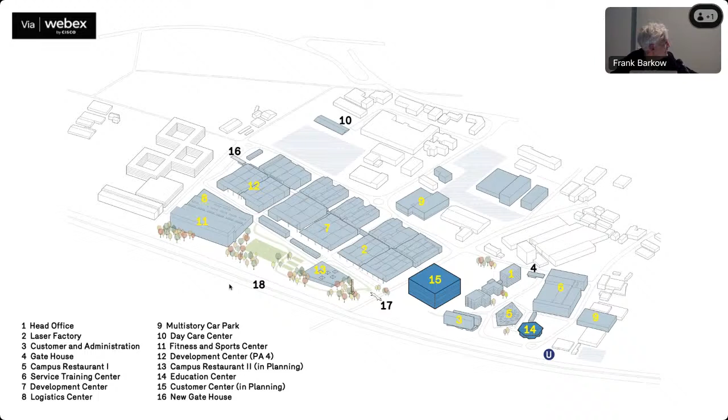It can adapt to new lands or more lands. It can adapt to programmatic changes or needs over 10 years, 20 years, 30 years. So the building we're looking at right now, building 15, is a vertical factory as a way of saving land.

Of putting machines in a way up in the air. So how do you do that? You have heavy machines, you're mixing it with office spaces, but to kind of come up with a structural idea that is kind of counterintuitive, right? Factories are usually horizontal. Ford factories from Albert Kahn in the 20s - we're trying to find a way to go vertical.

So in an earlier configuration of the project, we used four off-corner circulation towers as columns, which we talked about today and in the reviews. And then sort of woven into these trusses, which then the truss depths are for office spaces, and then spanning over production or kind of factory spaces around it.

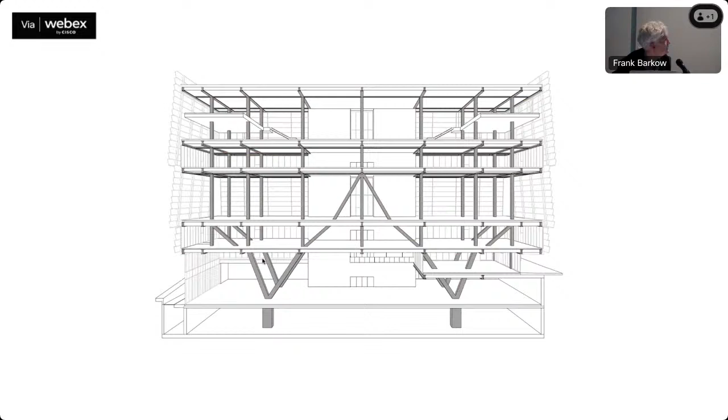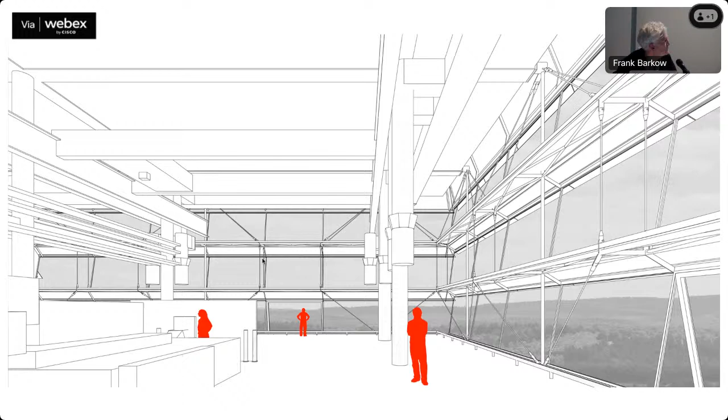In a second configuration, to be more economical, we ended up creating a kind of bridge structure over a kind of showroom space over here. So there was an idea of the structure being more economical, saving steel, making it simpler, and then combining the structure with a secondary kind of space frame for the facades of the building, which are woven together on those over the corners, which cantilever to use the technology in that way to produce a building which is vertical, which is meant to be communicative, both visually and physically, being able to move through structure.

So I'm very much showing you work in progress with a project like this, which again, we're very much in the middle of, and this is very much incomplete. But I think this is the last slide - showing the work up front, what I'm calling experimental or laboratory work, and how that might inform a construction process and the building practice, which we're still very much dedicated to.

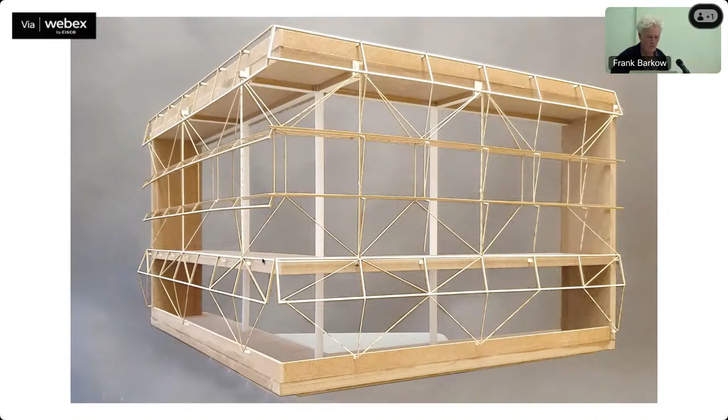Thank you so much. If you're ready, we will jump right into the questions. Okay, I'm ready. Does that work for you? Yeah. Okay, great. How far do I hold this away? Because I don't know. I never did.

So I have a question that has to do a little bit with the topic of reflection. It's the end of the semester as well for us, and I think you mentioned reflecting as well. You started your presentation with the archive, went on to further projects that all had a certain connection throughout. When you create these archives, in a way you look back at them, but my question is, when you, for example, start a new project, do you consciously reflect and take from the previous work and decide to bring these parts into the new one? Or would you say it's more naturally, subconsciously, that it's already kind of part of your practice? And adding to that, what do you ask yourself when actually reflecting upon these previous projects?